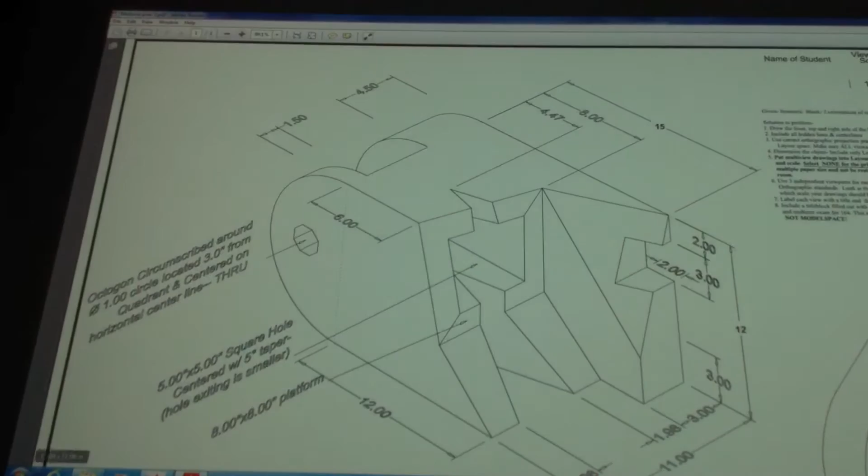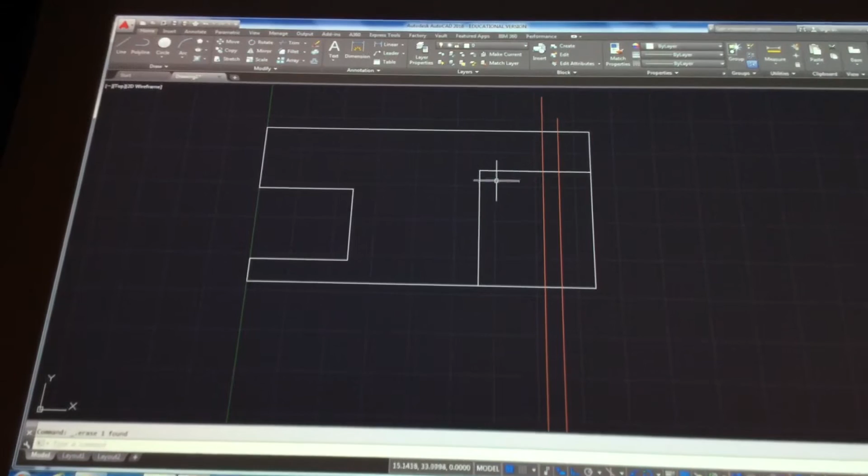And take this forward, and I know that it is going to come back to here. And then straight forward. So now I can get rid of that one, or could have converted it, not a big deal. There's a line representing your oblique plane back here. And then these guys get trimmed up to this point here.

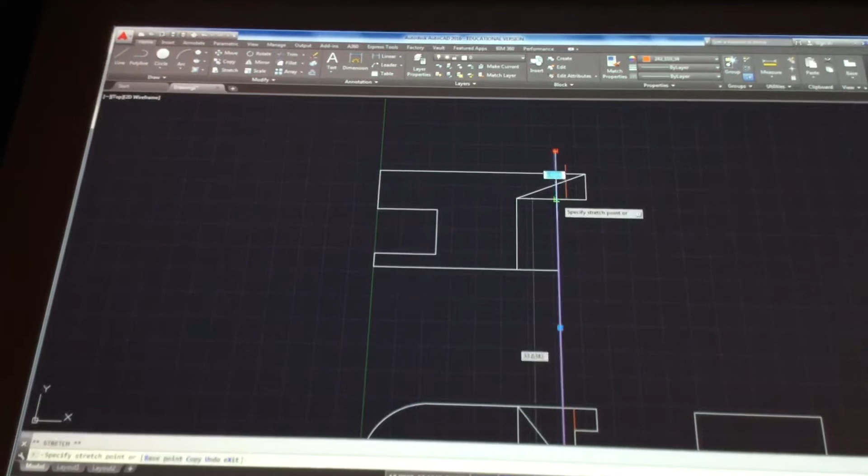And if you really want to, you can take this forward and bring this up. Like I said, lots of ways to get it done. How you do it's up to you. Okay? The slot cut through here. I'm going to leave it temporarily until I get my side view drawn so I can figure out where it goes through here. All right? Other aspects. We'll wait on the 5x5 hole.

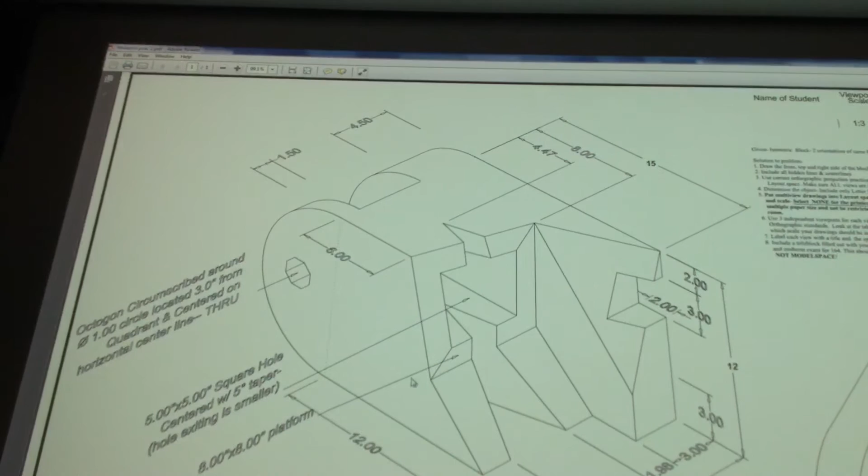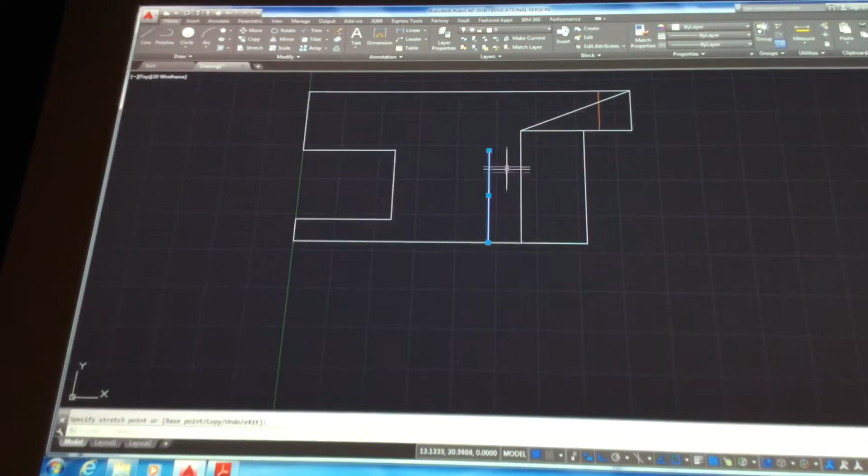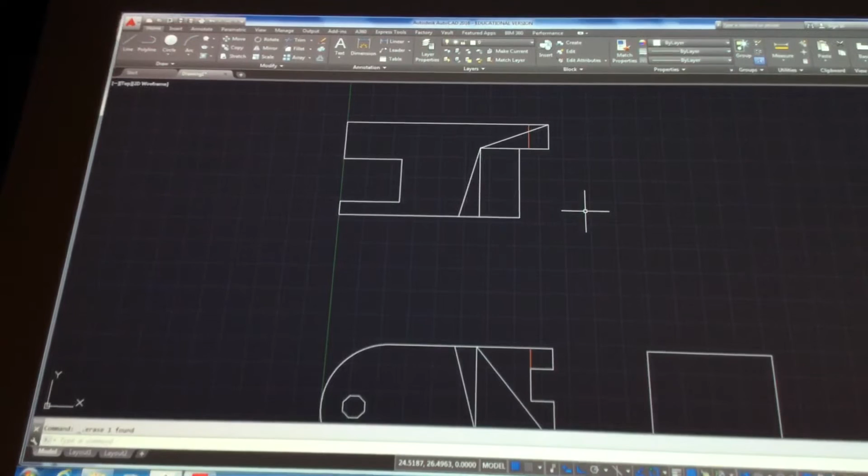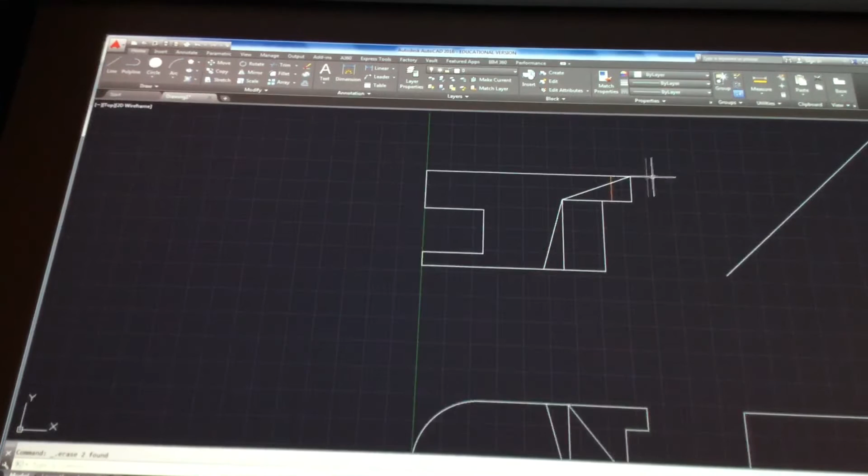For the most part. Now, what I need to get to is the side view and finishing up this aspect of the slot cut through this oblique plane. All right? I want to start projecting. Take this over, take this up, let's do a 45 here. Will get us a nice angle. All right. Take this across, this down. There's the thickness of it. That's the back of it, so I don't really need to worry about that. So there's the thickness I have to deal with.

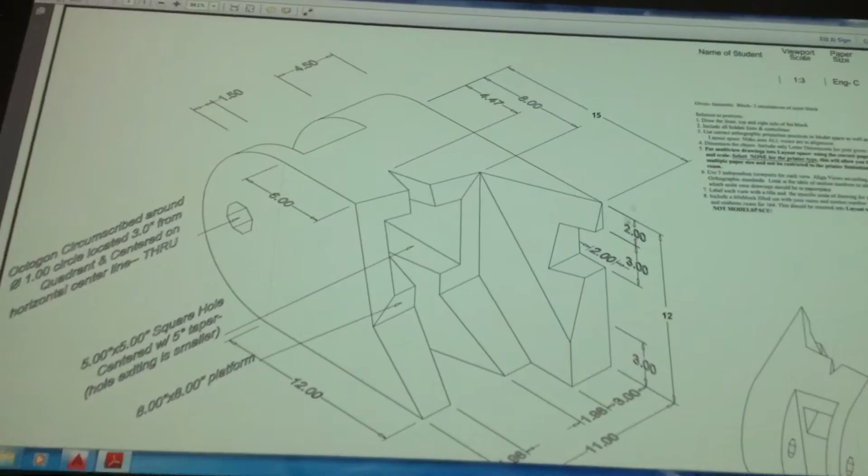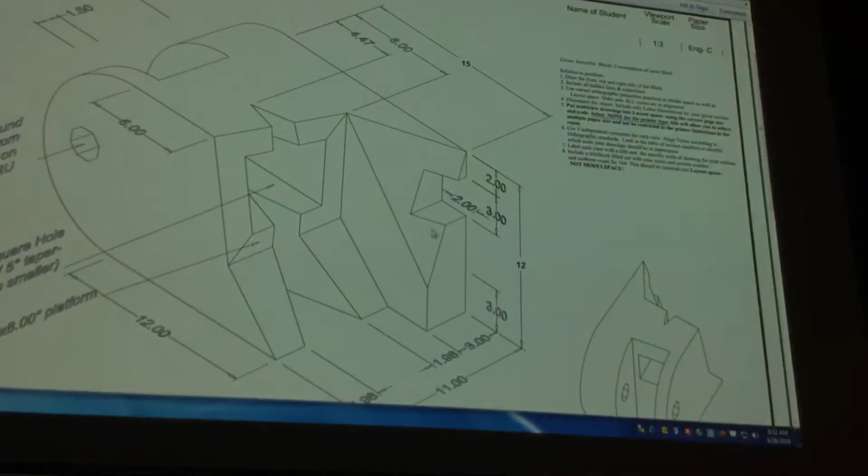And if you remember, it starts at the point that's down to 3 inches above. It doesn't matter, because I know it's here, and then up to there. Slot cut through is here and here. All right? Once you get to this point, lots of things can take over, right? Especially parallel lines, where they actually go through, all right?

So the first thing we have, this line is parallel with this line, which is parallel with this top cut. And this angled component here is parallel with this one, okay? And those are all helpful clues as to how you will figure this thing out. The endpoints here are a nice little indicator for figuring out where the angles were, okay? Like in the top view, I need this point especially. Well, this would be handy to figure out and create a parallel line with. So as I'm looking at all this, parallel line here, parallel line here.

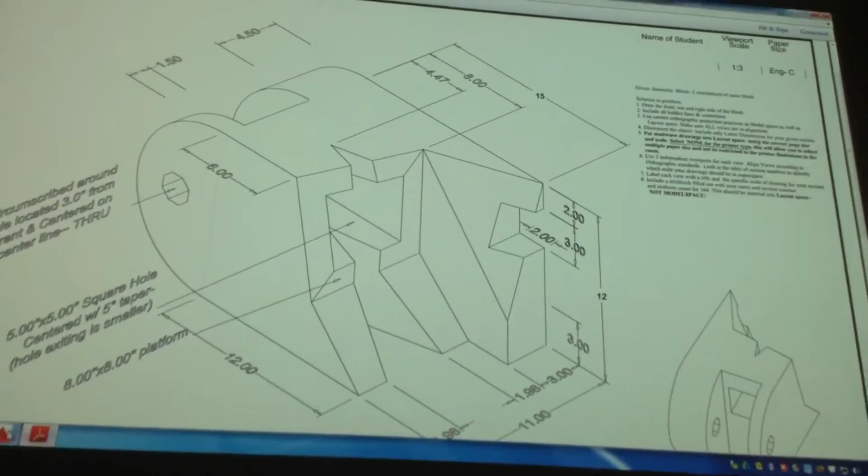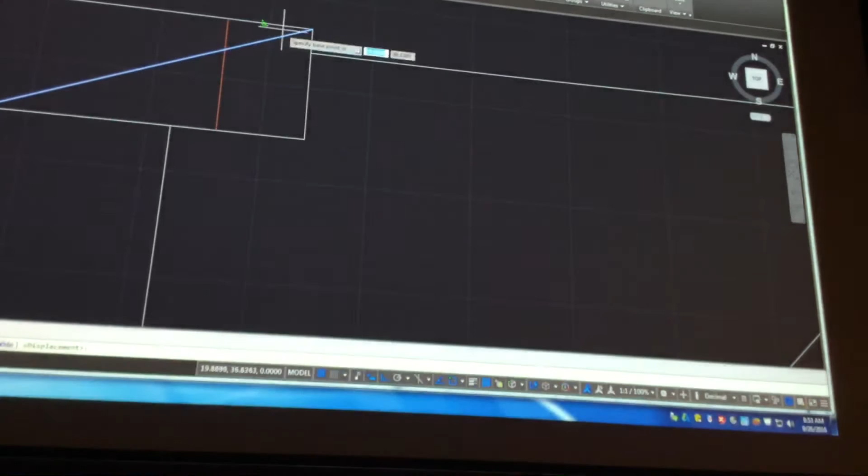All right. As I come to where these things are figured out, okay, I ended up getting my angle guy here put in, which is helpful in creating where exactly that thing starts to angle, okay? Which is at that point. So at that point, I can take this line and copy it from here to there, and I can trim it up. Fillet, a handy little guy with a radius of 0, will cut things out of there, okay?

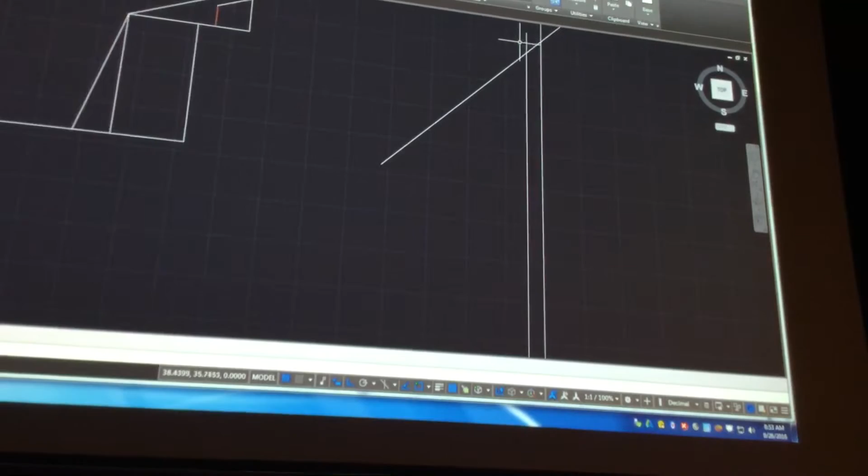And then this is the bottom where that slot ends up going, here to here. And just like that one, I can take this and copy it from here to there. So that is the extent of where that slot ends up going through the oblique plane.

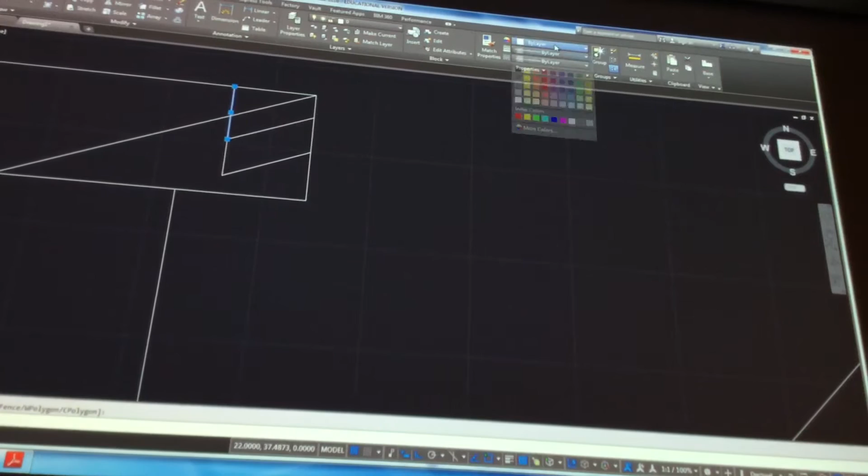Now you've got one last thing to do, which is convert this to a hidden line. And that's all you're really going to have to load here, just a hidden one, or a dashed one. I'm already past it, so once you get that done, you should be able just to turn that into a hidden line. So there is that component.

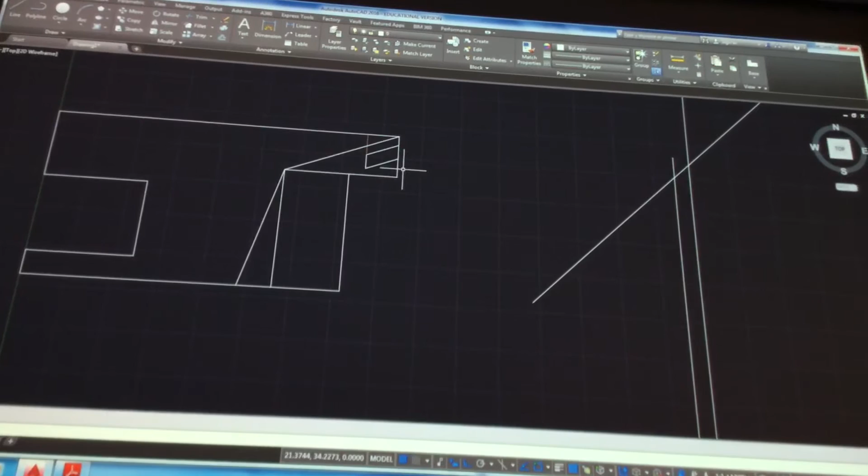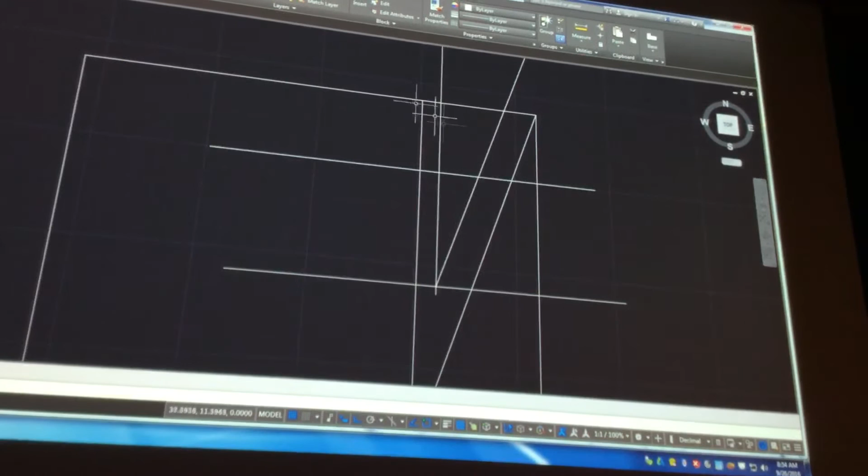Now, once I have that figured out, I can take either one of these points over and down. And let's get rid of these, and then take this and copy it from the end point to there, and that will give me where it exits the side view. Lots of trimming here.

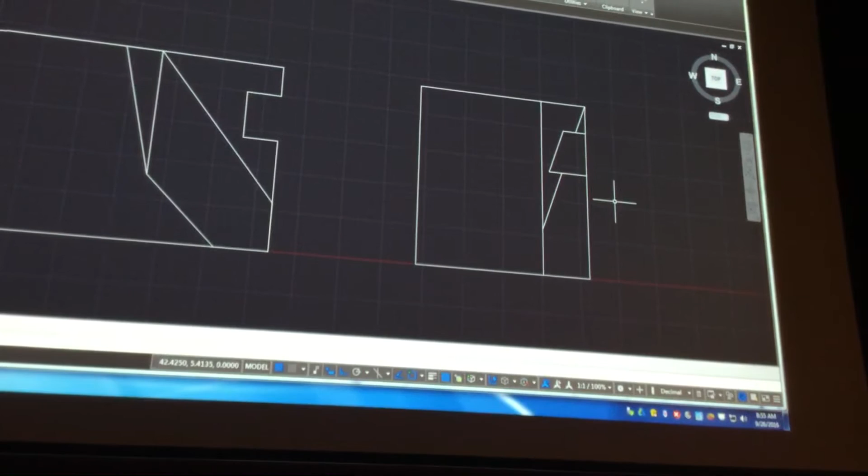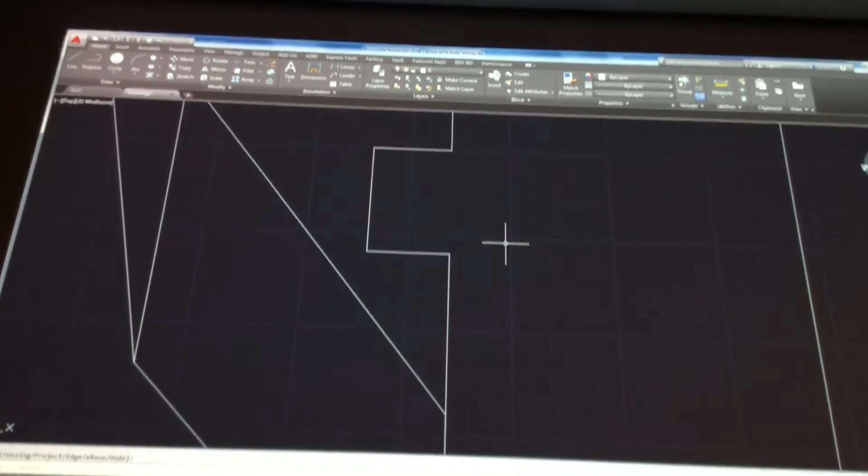And there you go. At least for the side, that side slot. Okay? But you'll see it takes all 3 views to get something like that done. It's not impossible, as long as you remember the parallel lines in the isometric are going to be parallel in the orthographics. Okay? Remember that. And the nice part is, anytime you look at the hole cut through there straight on, it's just going to be representative of what its shape is. Alright? Which means, 2x3 slot cut through here, I can actually get that put in there. Alright.

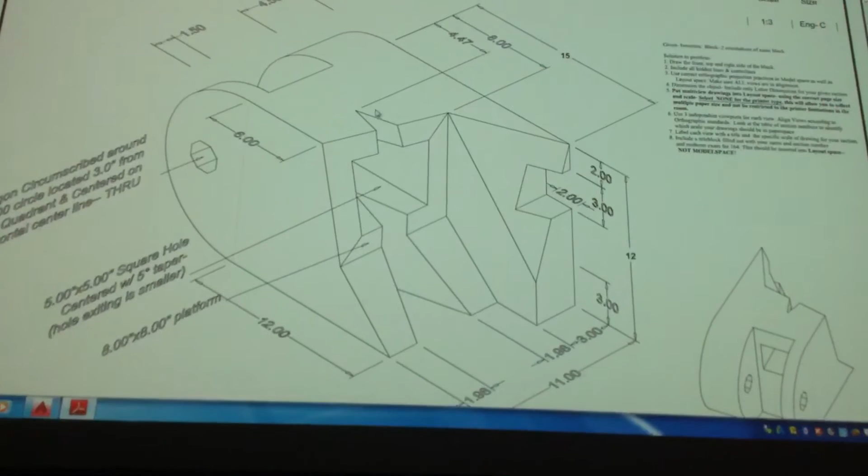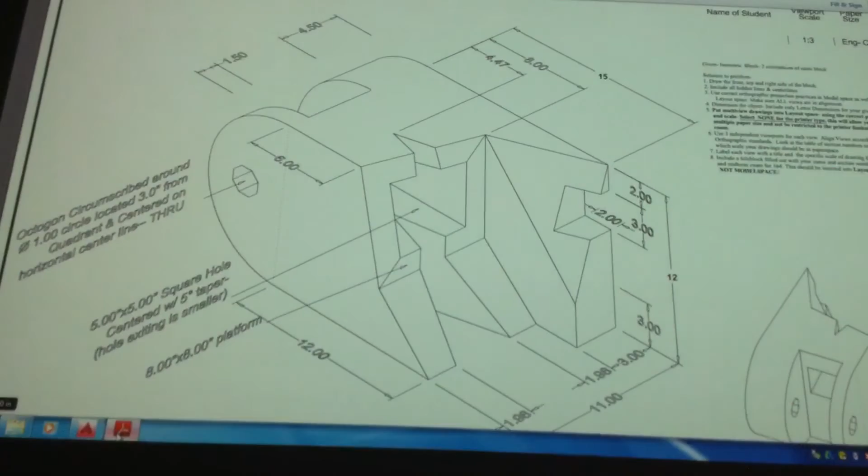Where do we go next? Well, I got this 8x8 thing with the 5x5 hole cut through the middle. And then I got a wedge shape, or a triangle shape cut through it as well, which we'll get to in a second. I'll do that in the top view. So in the side view, my 8x8 cuts down to here. I believe it's centered. Looks like it's centered. Yeah, centered. So the nice part is, let's do a diagonal across here and then a square.

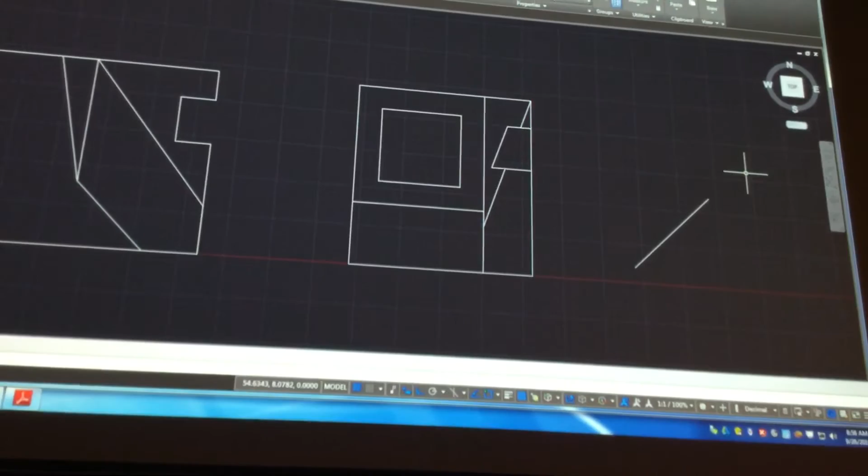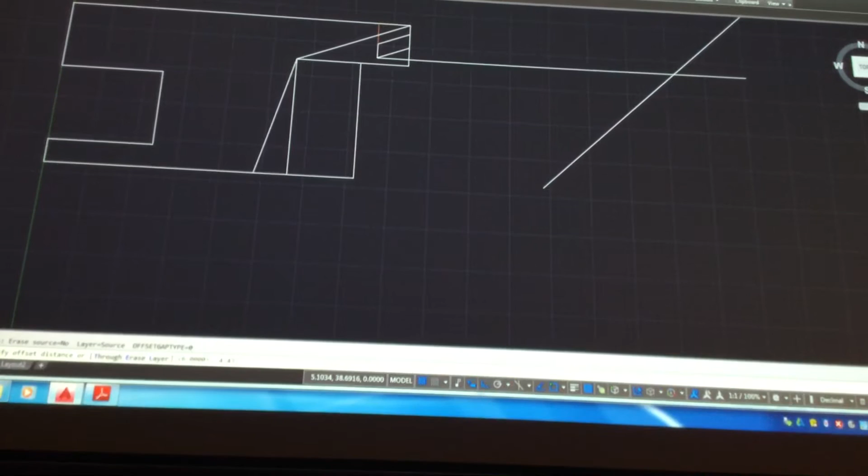And then place it right in the middle. Move from the midpoint of this to the midpoint of that. Then get rid of the diagonal there. That's the nice part about diagonals. Okay? Once you get that done, let's think about that slot thing then. It goes to 4.47, which is a weird number, and 1.98 each direction. Easy enough. So come back 4.47 and 1.98 over and 1.98.

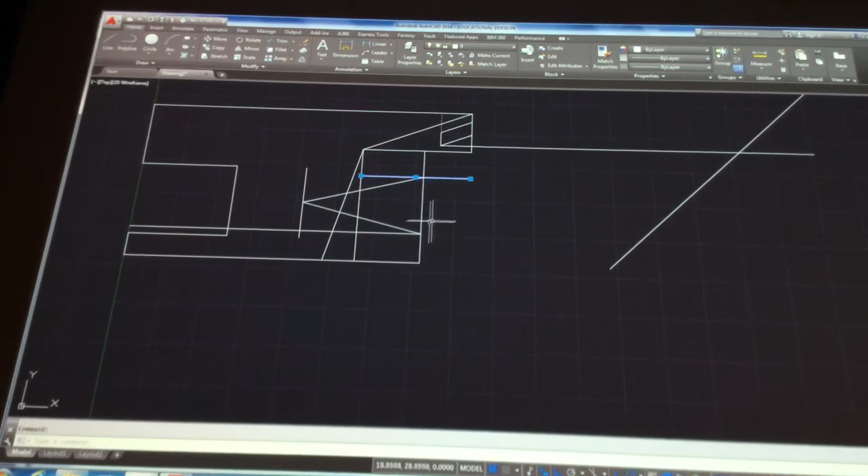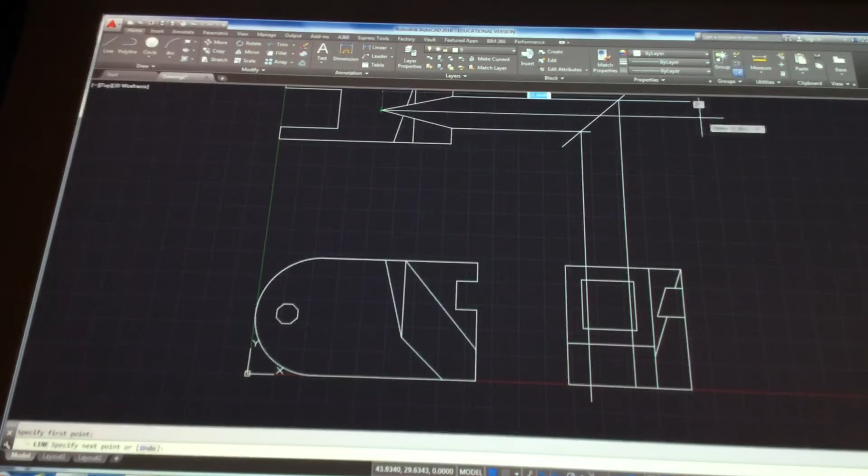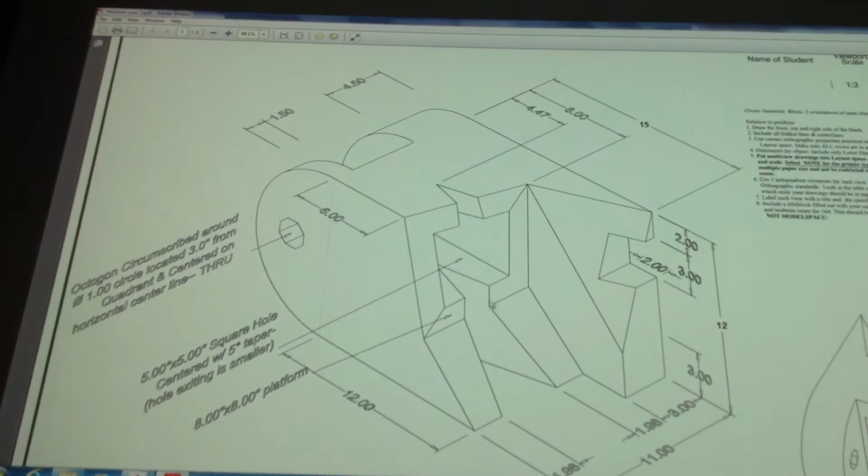Draw your slot through here, triangle shape anyway, just by going to the midpoint and then trimming things through here. Gives you the shape that you need. Okay? And then from that you can take over this direction and down and over in this direction and down. Essentially you're going to end with several things happening here. Looking through this thing, okay? Now it doesn't cut all the way through because it is tapered, so we need to end up going through as well. You'll have an angle here and here to the midpoint. So lots of this information is going to be determined by a couple things, where it actually exits. Okay? So you will end up with multiple lines.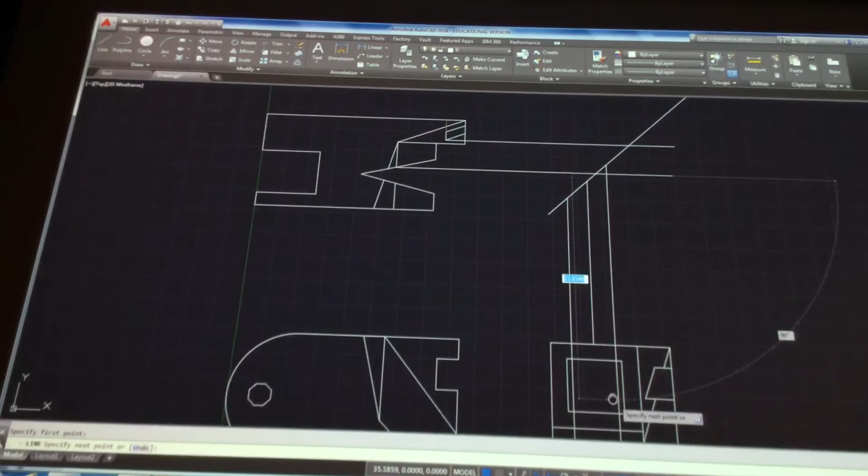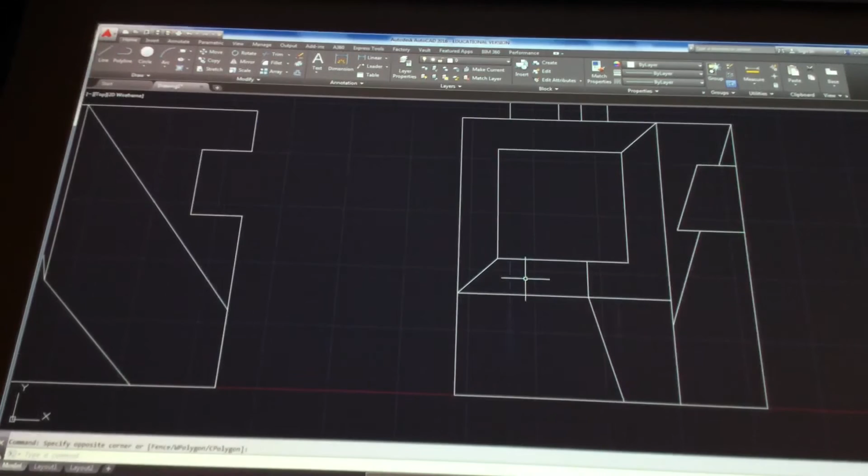In other words, from this point across and down, that's at this point, then it comes down to here, heads straight up, and then we got this line that cuts through here and down to here for the most part, representing that slot, or the oblique plane, I'm sorry. There we go. Okay? This is gone, and instead of just doing it both sides, we can mirror this thing when it's all said and done. All right? That's that one. So technically, I take this and mirror it. Get the other side.

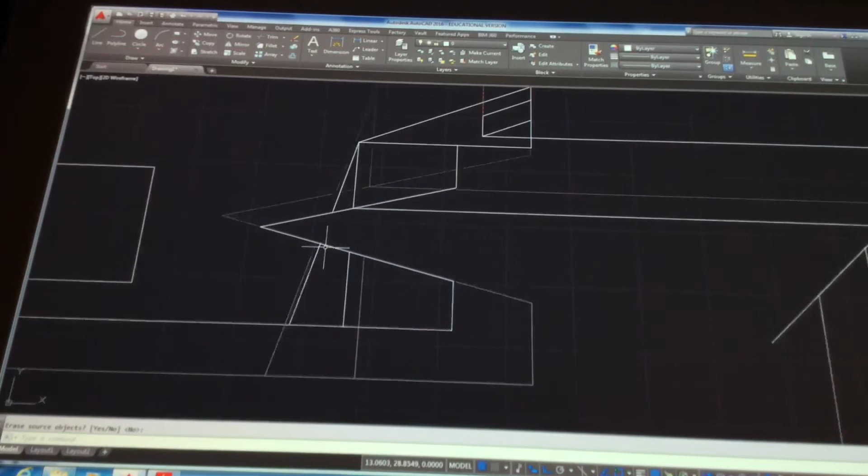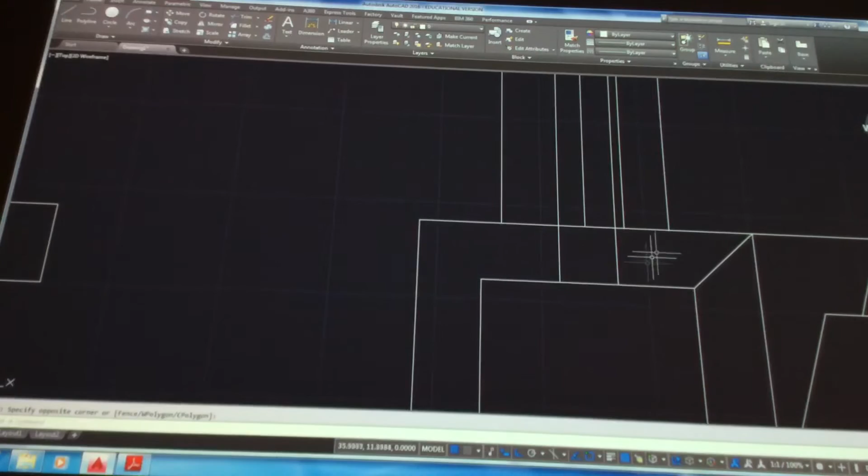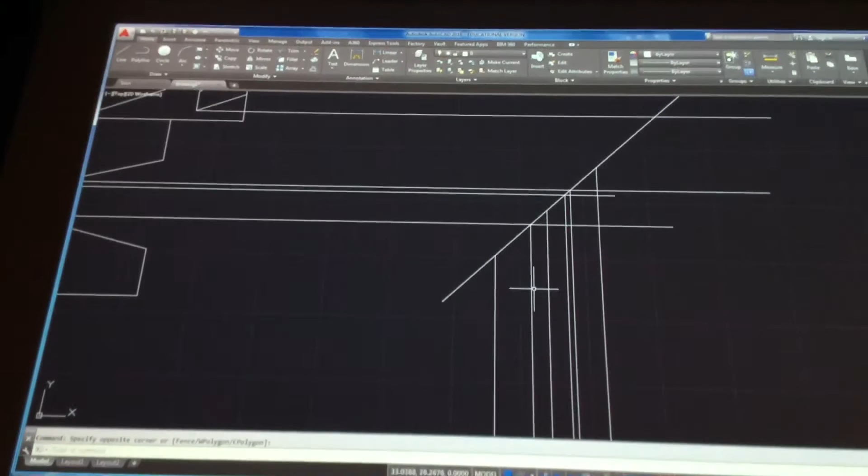This is going to go up until it hits this point, as well as this point. Now this one you can't mirror because it's in the oblique plane, which means this point and that point. And then from here, this is going to angle a little bit until it gets to here. Figure it out at this point, angles to that point. So lots of stuff happening there. And like I said, it's a little confusing. So let's clear some stuff out of here.

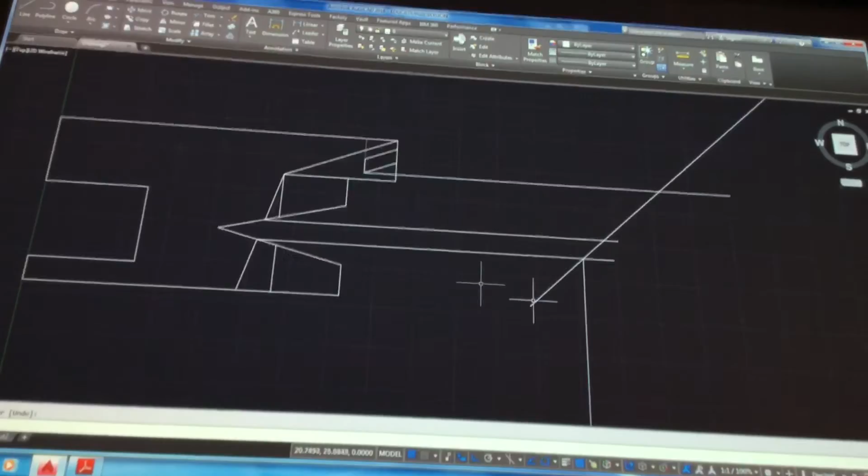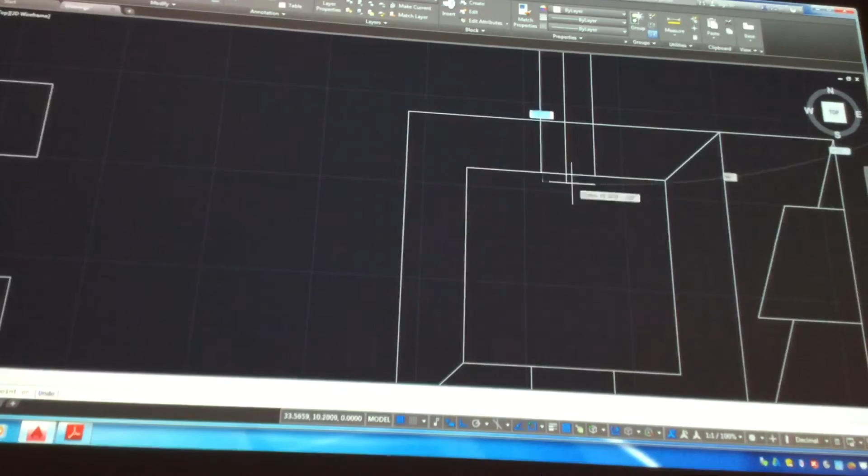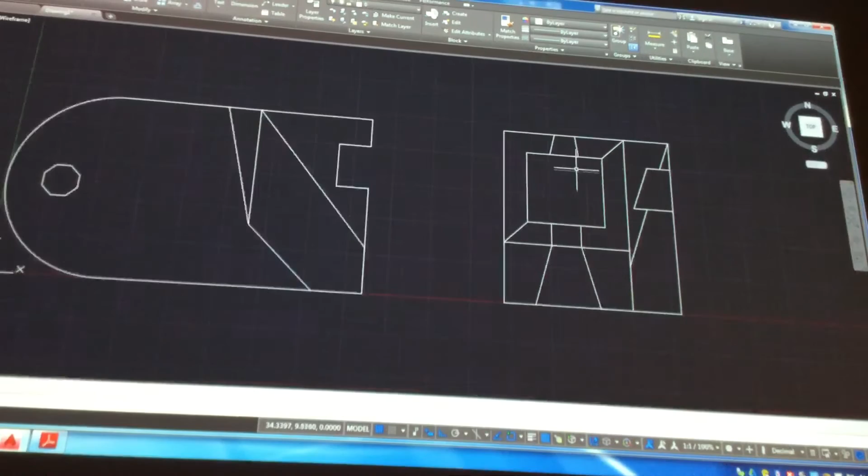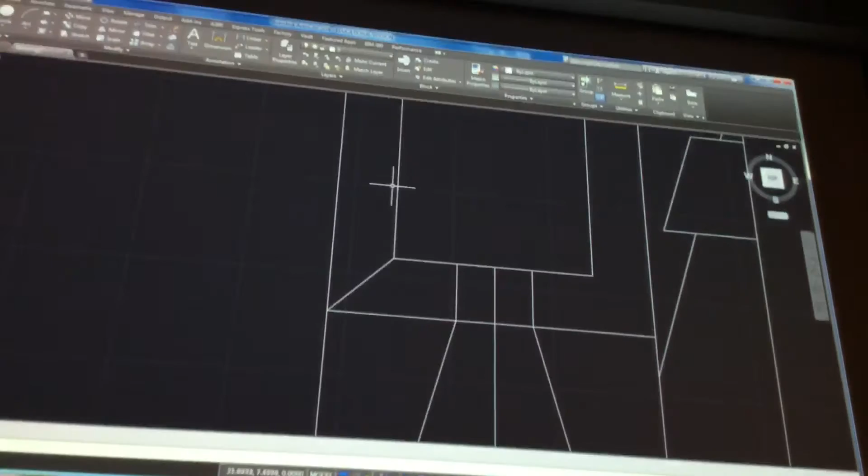All right. So we got that point, which we figured out. This point and this point are my next ones to deal with. They will go to here and here. And then from there, you've got angled lines. Okay? To the midpoint, which should be that. All right. So we'll take this back up real quick. So that's how it's supposed to look. All right. Oops. Got rid of the one I needed there. Midpoint. There. And then you get one all the way down there. So, matter of just working through these things, getting to the end solution there, okay?

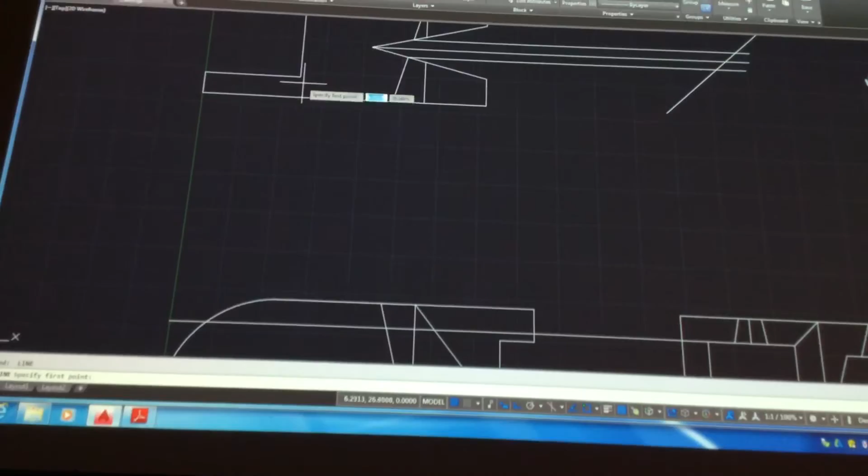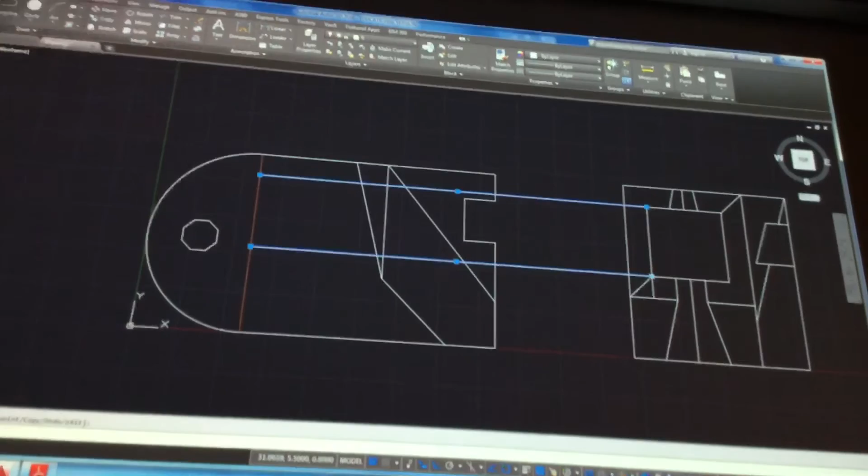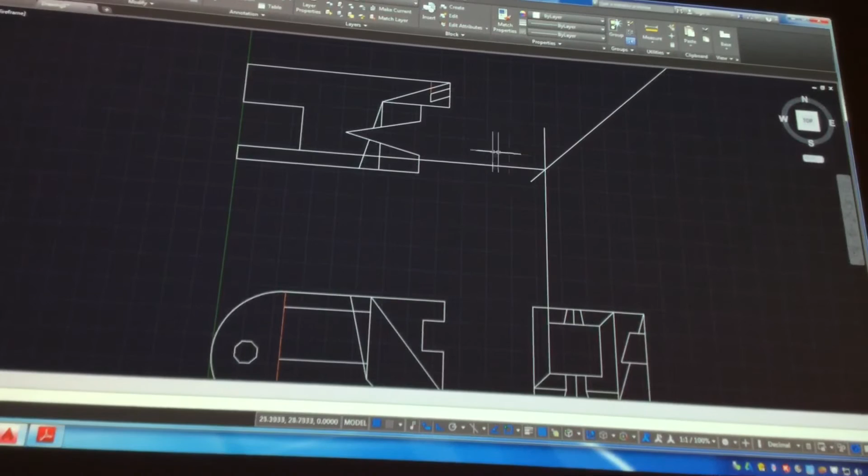Hidden lines, you can figure out where it's going through here. Now, I've got a slot cut through here that terminates there, so basically this is a hidden line as well. And then this ends up going through there. If you are unsure, basically you can work it out. Now, there is a bit of a slot through there as well. You've got a 5-inch hole coming through here. See, it lines up with that one, which is there. So it means it lines up with this one here. These will be your hidden lines, except for part of it that's going to be shown. And that part is actually being cut through your center.

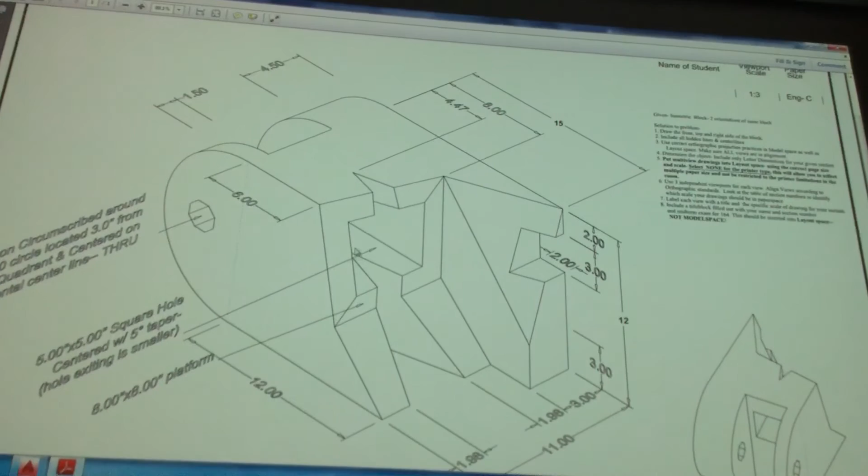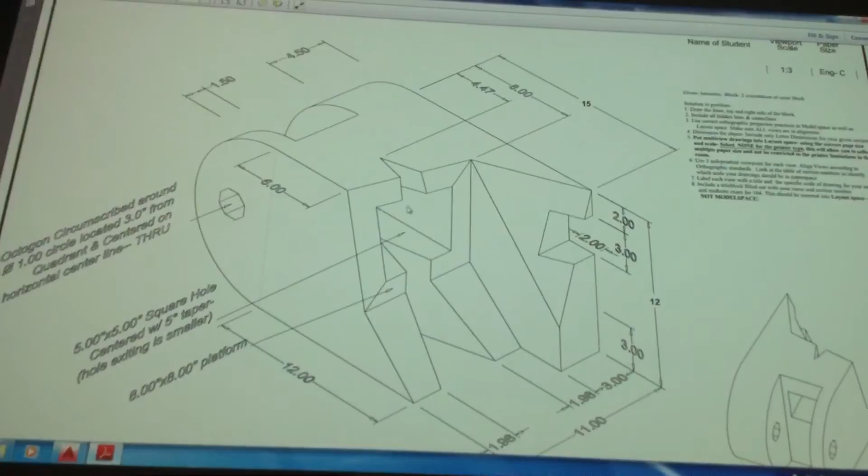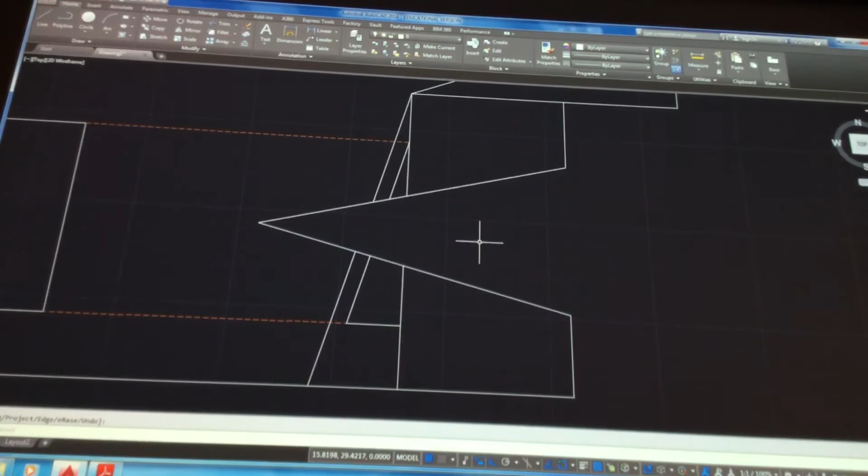So at this point, it starts angling up at that same angle, parallel here, as you're looking at it. This is parallel and parallel. So pretty straightforward as to where things are going to go through. So I'm looking at it in the top view. This one's the one I really need. I figured out it starts right at the corner here, which means I can take this and copy it from here to there and get over to this point, and then this will drop straight down here and be visible. So that's how it's supposed to look in the top view.

In the side view, it's already shown. In the front view, you can take this down and do here, and take this and copy it from there to there, and get your front view. So here and getting back there.

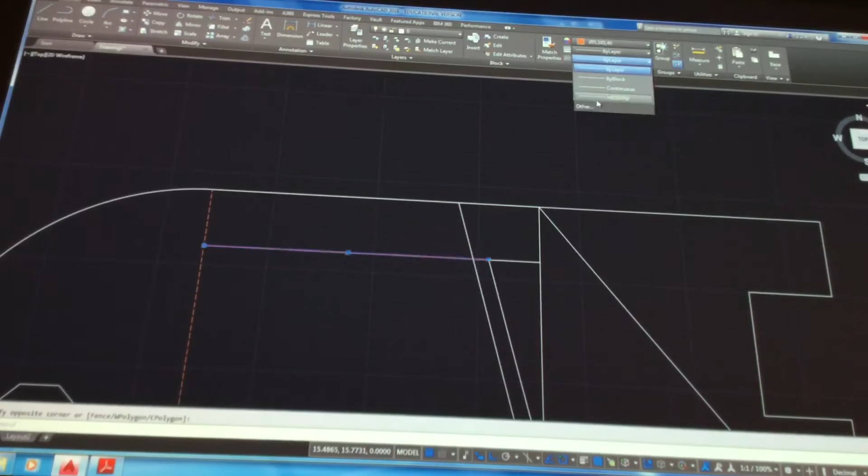All right, so you get the idea working through this. Last thing, once you get everything done, now there's some other hidden lines missing. All right, let's get over here into the layout space. You're just going to click on one of the layout tabs. Probably one, unless you screw it up, then go to two, and then come back and delete one.

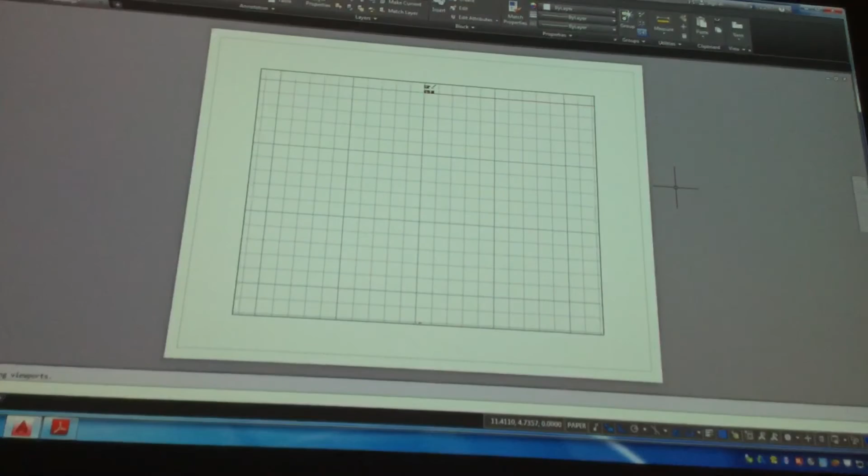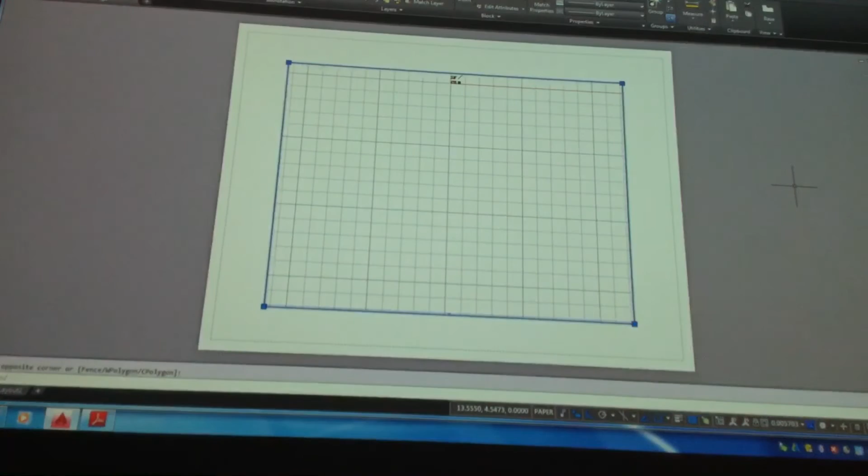Okay? Doesn't really matter. The whole idea behind layout was it used to be called paper space. The paper space was used specifically for printing. That was it. You don't draw on it much, you just print on it. So, the white space represents the visible paper. Since AutoCAD was created for the manufacturing industry, it starts at 8.5 by 11. You will not be getting an 8.5 by 11 sheet on your midterm. It will be architectural C or engineering D or E, okay? And then you will get a specific scale associated with it.

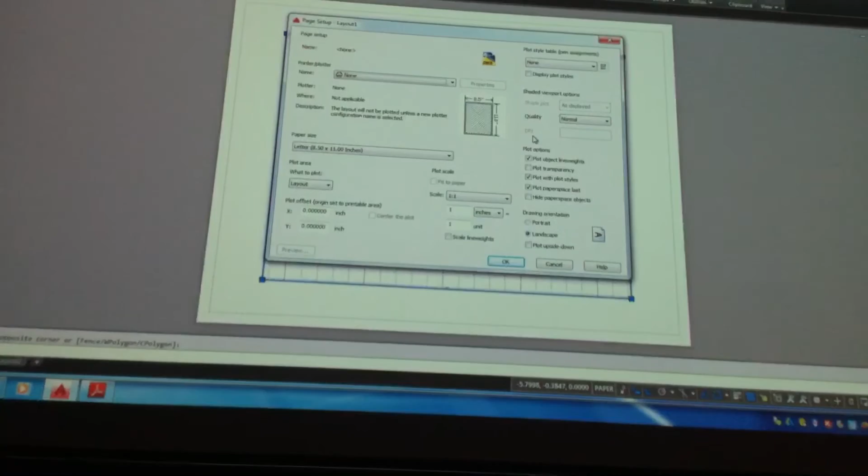First thing, right mouse click on the layout down here, and you are going to go to Page Setup Manager. Once you're here, it identifies the layout accordingly. You're just going to hit Modify. Now, this is where AutoCAD tends to take over, and it will default to the printer of the room you're in. Okay? Change it to none. Alright? Right off the bat, just change it to none. Because none gives you every paper size imaginable, which allows you to finish what you need to do.

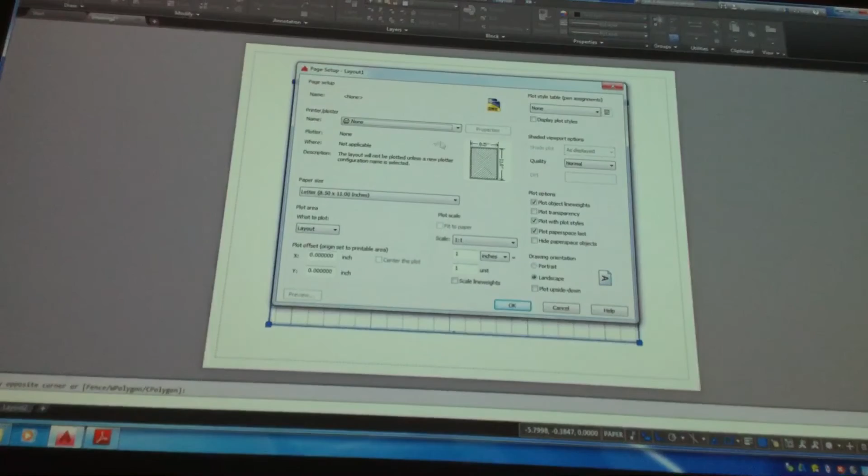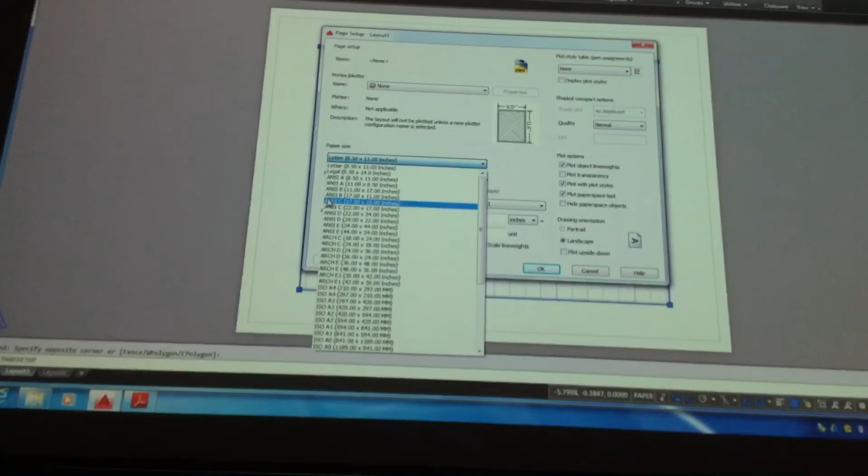Right? Say we wanted architectural D. Okay? At none here, I can open this up. Anytime I tell you architectural, you're just going to pick the architectural D or C or E, whatever paper size I identify for your section. Okay? If I say engineering, engineering has adopted the ANSI standard of paper sizes. All you got to remember: architectural, you pick the ARCH. Engineering, you pick the ANSI. Pretty straightforward. So we'll do architectural D.

And we'll hit OK. Do not screw around with the plot scale here. It's not bad if you want to do it here, if it's for the entire drawing. But in most cases, a lot of architects will have multiple drawings on the same piece of paper at different scales, right? And if you end up putting a 1 to 4 scale here, and then you end up putting a 1 to 4 scale on the viewport, you got a 1 to 16 scale. They multiply. Alright? So just leave this one at 1 to 1, and your life will be so much easier, less stress. Hit OK.

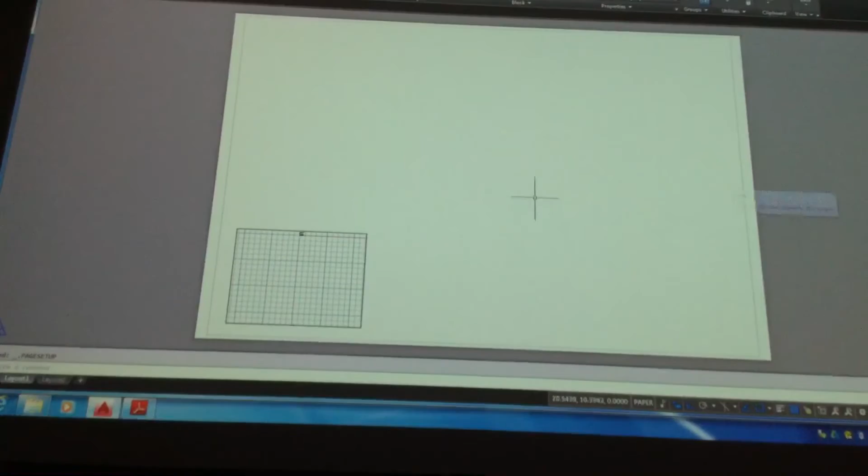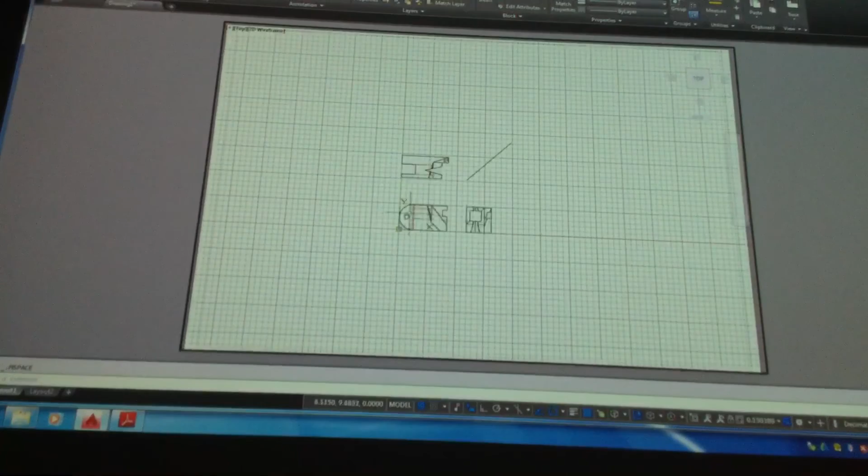You'll notice that the page has enlarged considerably in white space. This thing is called the viewport. It is a window into model space. Click on it. It's just an object. Okay? And you can stretch it out around the paper. Double click inside. We are now looking at model space. I can zoom up. F7. Find it. Turns off your grid. Please turn off your grid. Okay?

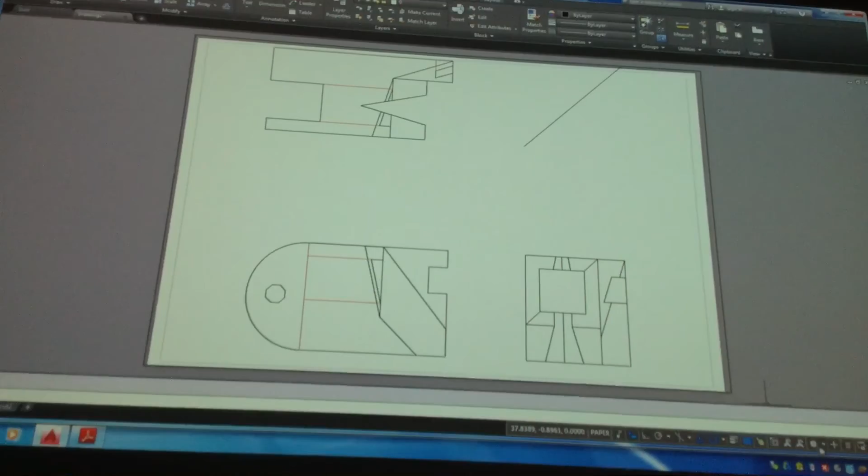Once you get this sort of centered, double click outside of it and select the viewport. When it's not selected, you will not get your scale window down here. Click on it, scale pops up. If I tell you 1 to 2, I'm up here at 1 to 2, and there's a 1 to 2 scale. Okay? Straightforward.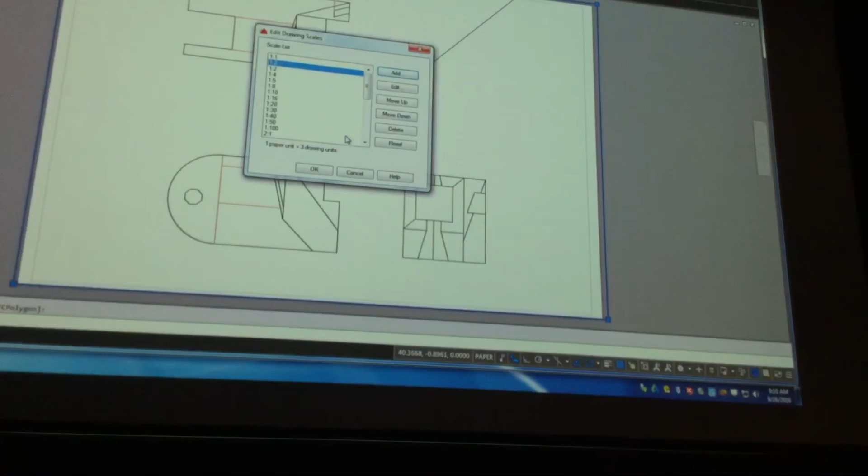What happens if I give you a scale that's not shown? Down at the bottom, there's a custom. So I want you to add a 1 to 3. 1 unit page equals 3 on the drawing. Hit enter and OK. Take this. Now I have a 1 to 3 there. That's a 1 to 3 scale. Most of the time, all of the scales are pretty much given. The 1 to 3 and the 1 to 5 tend not to be shown much. So if you happen to get a section that wants a 1 to 3 or 1 to 5, not a big deal. Create it real quick as a custom, and then you can assign it.

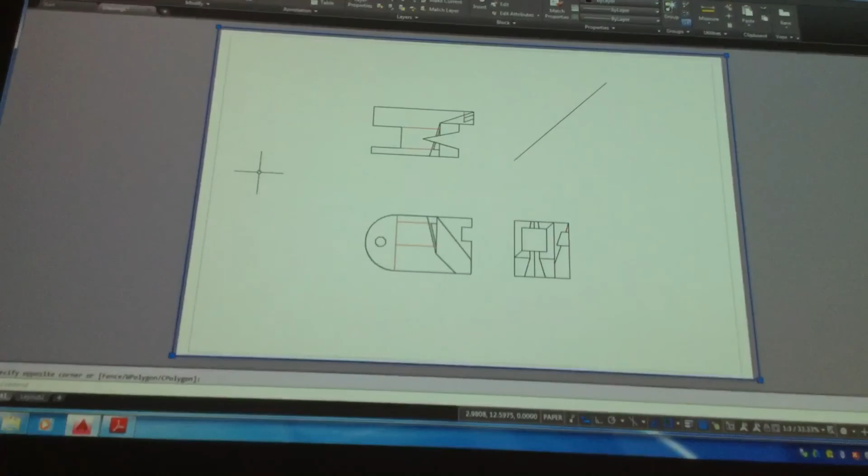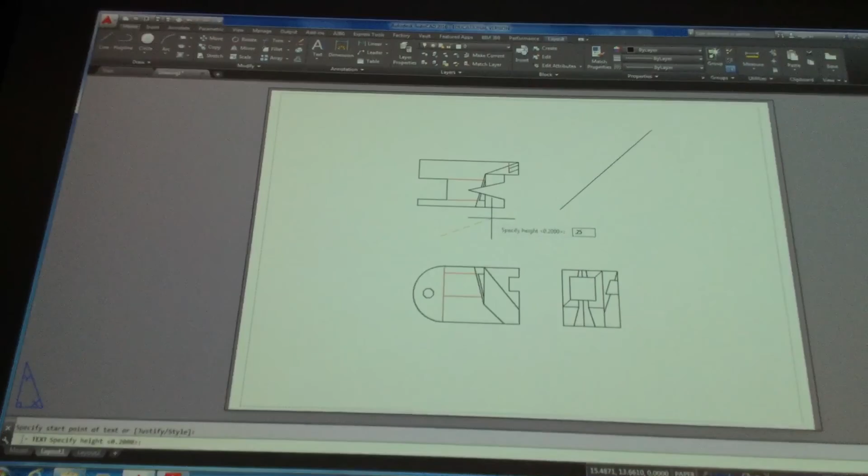The last thing you're going to do is add text in here. Identify the front view, the top view, and the side view, and put your name on it. Okay? And that's just coming up here to single line text and adding it real quickly. The thing about paper space, it goes back to paper size. So any text you put on the drawing at 18 inches or 21 inches wide, it's going to be up there around 2 or 3 inches to see it, right? This goes back to 1/4 inch size, whatever. So you say 0.25, 0, and you can say top view here.

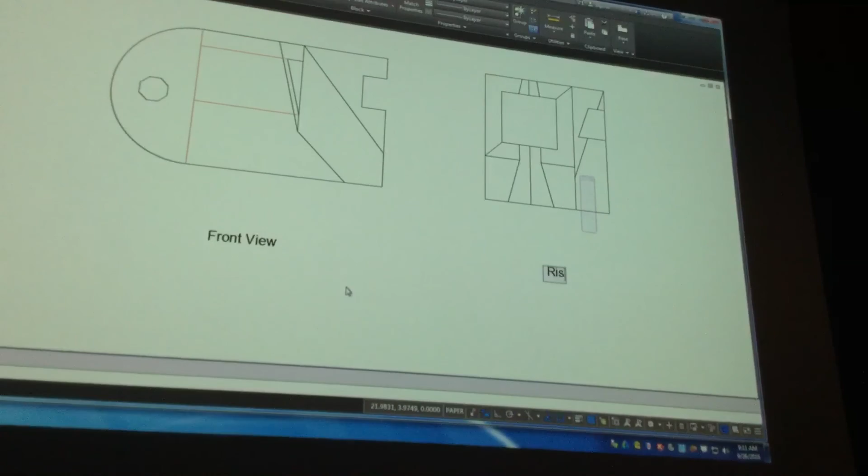Once you get it done, just copy it. Here, here, here. Change this real quick by double clicking. Like I said, oops, right side. And hit one more time, Cory. All right, and you're done with the layouts component of it.

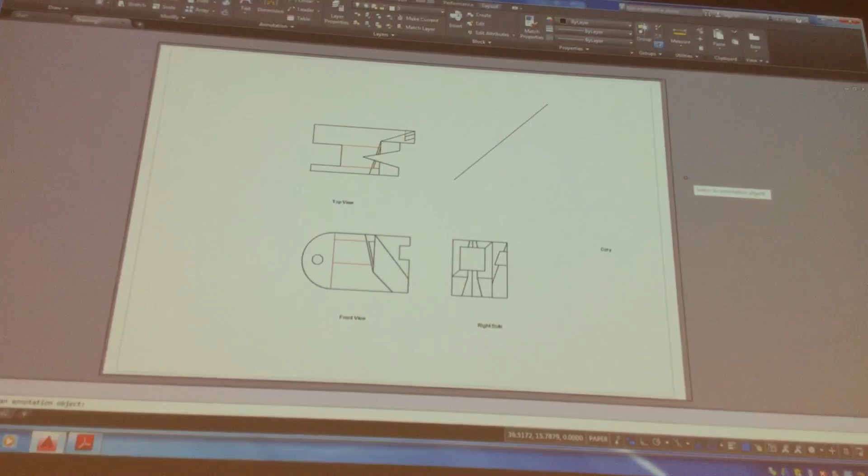Okay? Lights are coming up. Do not forget the layout stuff. It's probably the easiest 40 points you're going to get. Okay?